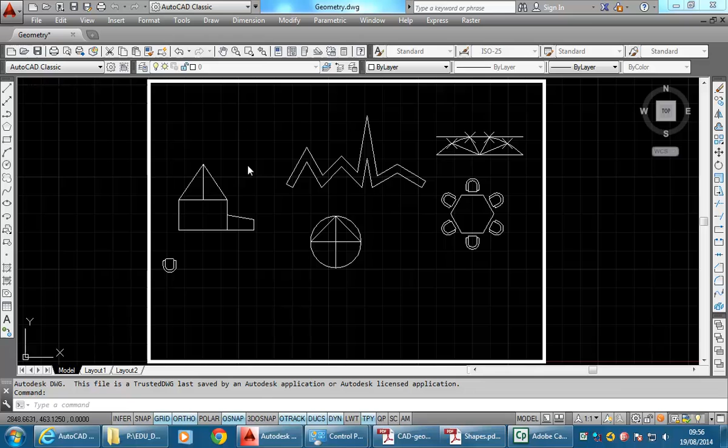Okay, so I'll have a look at exercise 9, and you can see here you're given the dimensions and the location on the cover sheet there. If you have a look through to the page in the notes, then go back.

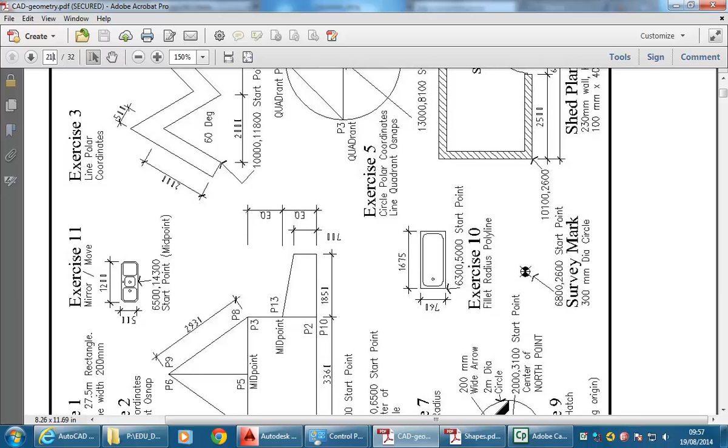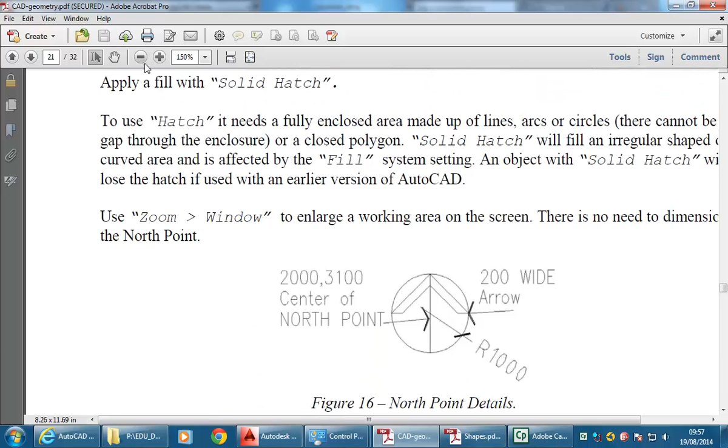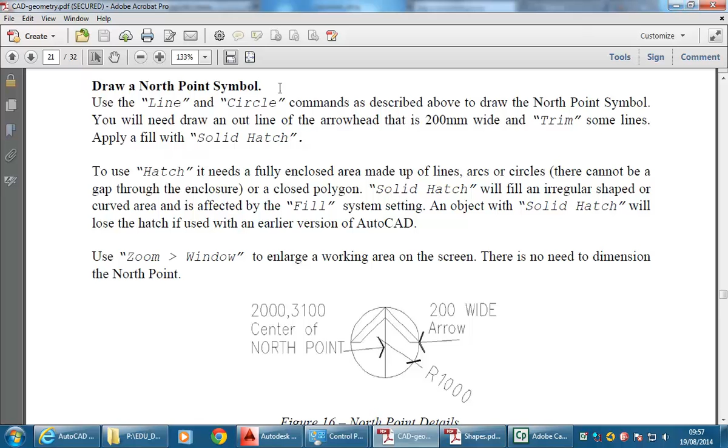You'll see you're given it there as well, but you're only given the steps for the hatch command because all the other commands you've used previously. So just make sure with all of these that you read the introduction with each of these later exercises. And so the first part you can see is using the line and circle command.

I'll put that on the screen just to the side so you can see it. I'll just minimise this, and just make that a bit bigger. That's a bit too big.

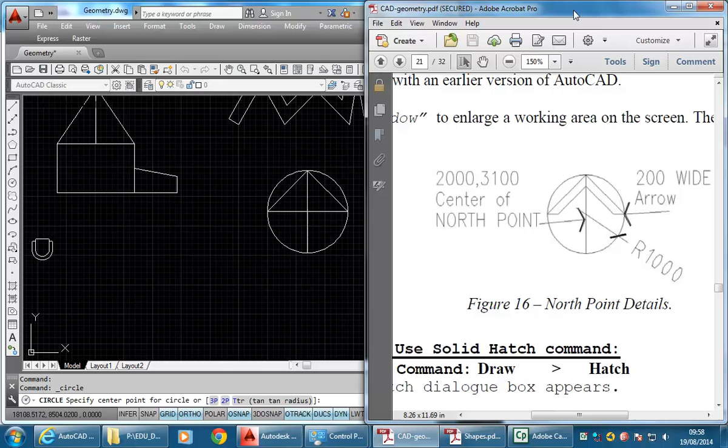Okay, so with all of those measurements there, you can draw first the circle, centre radius, and the coordinate there is 2000, 3100, just to locate it on the page. Enter, and then the radius is 1000.

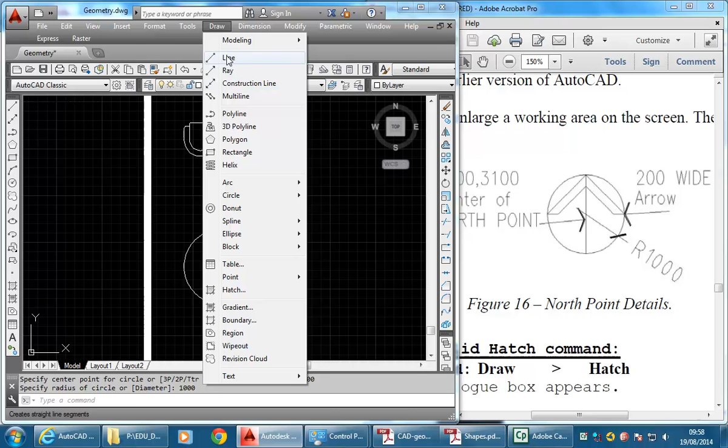And then to draw the lines for the north point, you simply snap to the quadrants on the circle as you're drawing your lines in the same way as you did the previous north point.

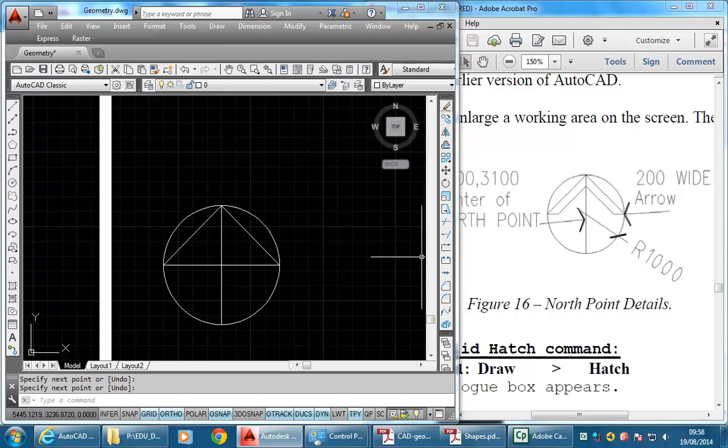And then you need to use your judgment a little bit. So the width of this arrowhead is 200 mil, and so you can use offset and then type in 200 for your distance, choose those angled lines and then pick below, choose the other one and then pick below.

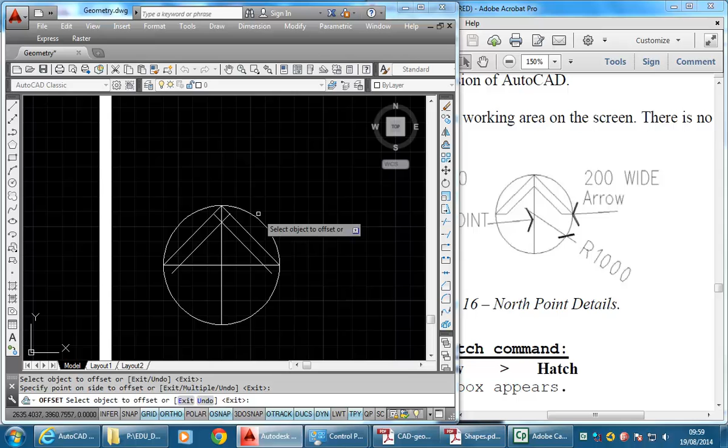Enter to finish, and you then get into the part where you need to use trim, which talks about in the introduction there, trim some of the lines. It's probably worth all of you having a look at this using the trim command, because there's a couple of tricks with trim that can make it a bit easier.

So once you choose trim, you'll see that it gives you the option to choose cutting edges, but a really good step there is to press enter instead of picking anything, and that'll make everything a cutting edge. You can see on the command line it gives you this option, select all. So by pressing enter, you use that option in the angled brackets.

So that's made everything a cutting edge, which means now I can pick any line and it should cut back to the nearest edge. And so I can also pick inside the arrow there, and I'll even take that one away. So you can just go and pick on the parts you want to take away with trim, and that's often what you'll want to do, without worrying about choosing any edges.

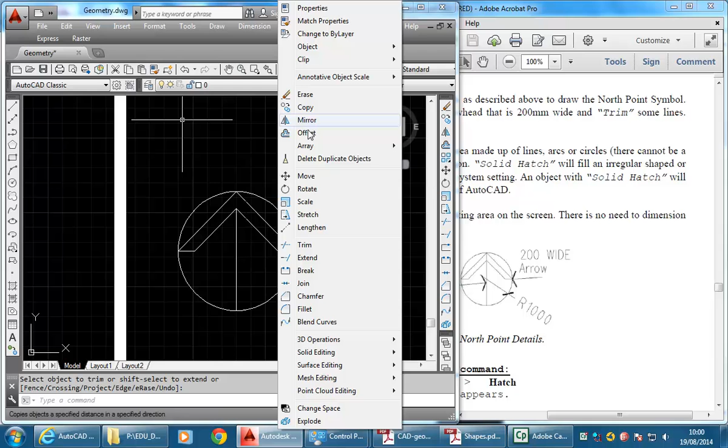But you've got to remember to press enter at the beginning. So as soon as you start the trim command, enter first - that's normally the way people use it. And so then you can, from that point on, follow through the steps using the hatch command.

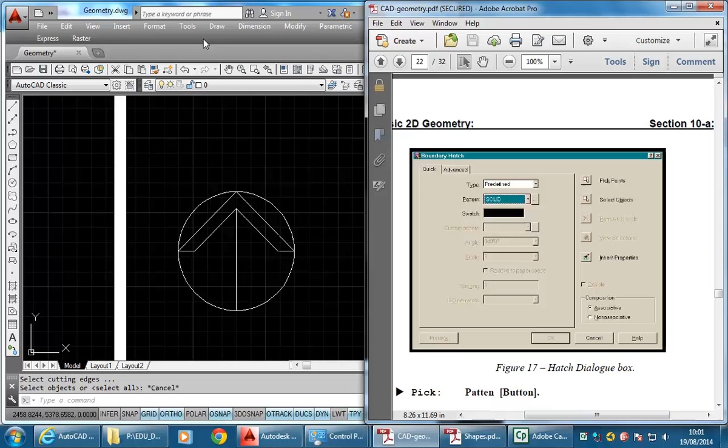You'll see the dialog box here is still the old one, but it's got the same options if you go to the draw menu and choose hatch and bring up the new dialog box. So there's just a couple of things I can show you there. If you don't see the dialog box, that means you're using one of the new interfaces.

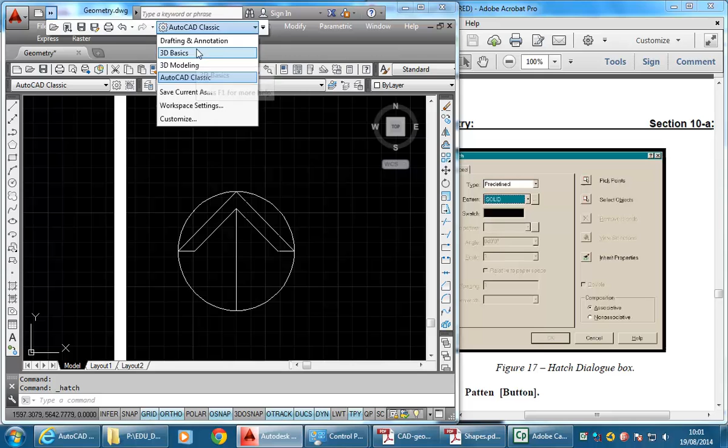So if it's on drafting and annotation, and even if you have the menus where you can choose hatch, or if you choose hatch on the ribbon here, you can, but it works differently. So you can see there, it doesn't give you a dialog box. It comes up on the ribbon there. You've got all the same options, but it does work a bit differently.

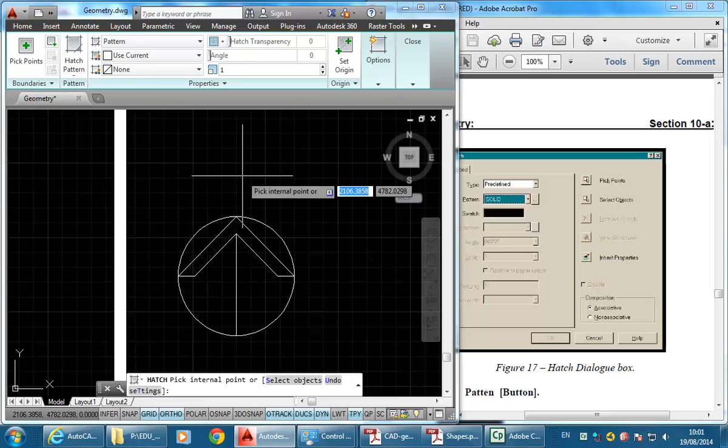So I'll press escape there, and I'll go to AutoCAD Classic, just to follow through the steps. I mean, try the new method - it's actually better, but yeah, it's good to see all the options come up in that dialog box as well.

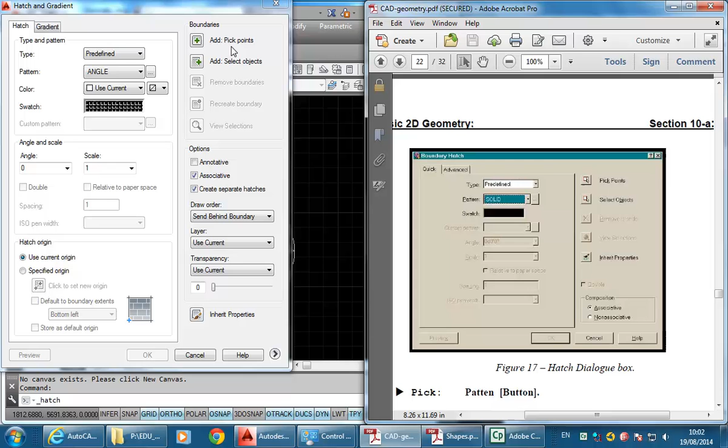So once you go here and bring up the dialog box from the menu, another thing to remember is that solid, the pattern that you want to choose here, you can see it's got solid, comes up in your list of patterns, but it's not alphabetically listed. I think they should put it in there, but this is just the way the programmers are. Because solid is the most common pattern you use, it's first in the list. So you just need to remember that solid is at the top.

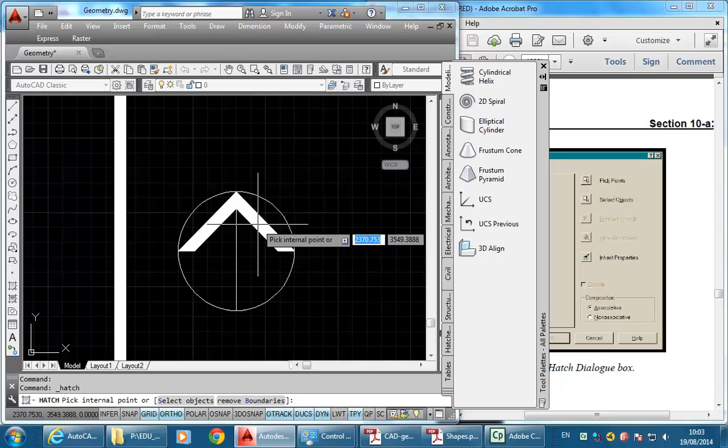And then once you've chosen your pattern, you can go to pick points, pick inside the arrowhead. If you've got two, if you didn't trim that line, you can always just choose the two sides. And then enter to finish, and then OK. Right, so it's that easy. I'll finish that video there so they're nice and short.